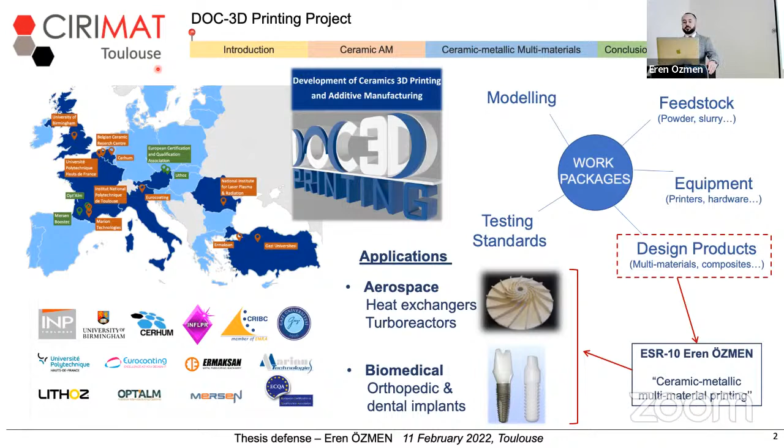Five work packages work collaboratively to transfer scientific knowledge into applicable industrial applications. As a member of the Design Product work package, my role in this project is to develop additive manufacturing approaches to fabricate ceramic-metallic multi-materials for applications such as aerospace and biomedical.

What is additive manufacturing? Additive manufacturing is a group of processes that create 3D objects layer by layer by following digital design data. According to the ISO ASTM joint standard, additive manufacturing can be divided into 7 subcategories, and this division is mostly done based on the feedstock used, for example powder or paste, or the energy source used, such as UV light or laser.

In today's presentation, the main consideration will be powder bed fusion technologies, and among those, selective laser melting and sintering. In a commonly accepted design for an SLS/SLM machine, there are 4 fundamental parts: the powder tank, building platform, powder spreader, and the energy source laser.

In the workflow of the SLM process, the building platform goes down and creates space for the newly coming powder layer, and the piston underneath the powder tank goes up and feeds the system with a certain amount of powder. The spreader spreads the powder on the building platform side, and once the powder layer is ready, the energy source selectively sinters or melts the powder particles to each other by following the directions coming from the digital design data, specifically for this layer. As this continuously keeps happening, the 3D object is finally formed.

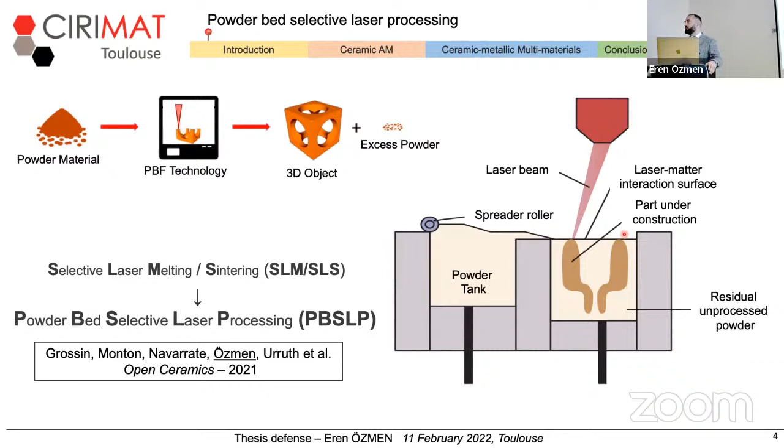In the review that we published in Open Ceramics in 2021, we proposed a name change from SLS/SLM to powder bed selective laser processing, instead of going by mechanism separation like sintering and melting, by just focusing on the process itself. So the acronym PBSLP will be used in this presentation to refer to this process.

Due to their good compatibility, metals and polymers are commonly used in PBSLP. For example, very complex shaped metal pieces can be fabricated with this method due to its design flexibility. On the other hand, personalized prototypes can be fabricated in a very short time by using polymers, as we see here for a jaw replacement operation, for example.

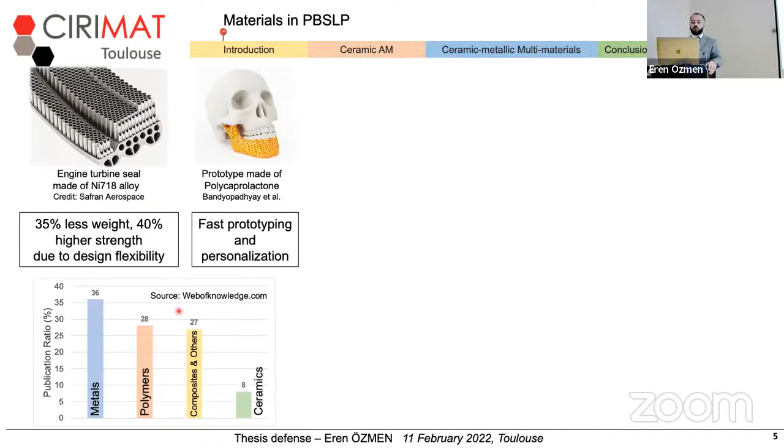When we check the number of publications in the literature that are focusing on PBSLP, we see that the majority of them are using metals, polymers, and composites. Only 8% of studies are focusing on ceramics.

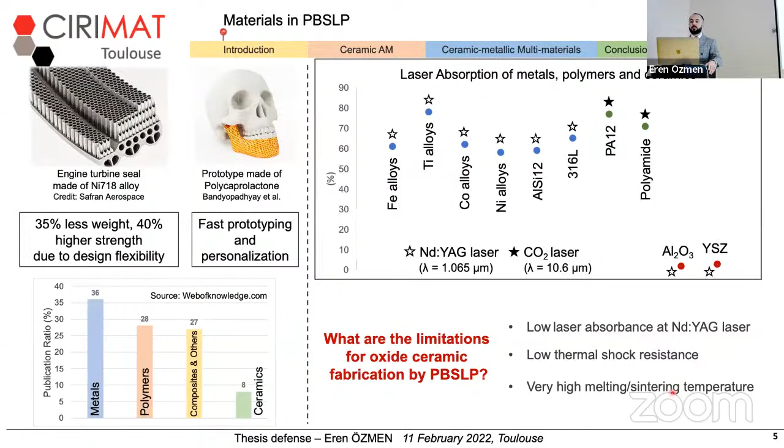So what makes them, especially white oxide ceramics such as alumina or zirconia, limited for this process? The first limitation is their low energy absorption, especially under Nd:YAG laser wavelength. Another limitation is their low thermal shock resistance, which is a problem in a process where very high temperature and very high energy are transferred to the material in a short time. And also their very high melting and sintering temperature, which is quite challenging to reach in a limited time as well.

To overcome these three issues, various strategies were applied in the literature. For example, Wilkes et al. in 2013 aimed at reducing the thermal gradients between cooling and heating by introducing a preheating system in their PBSLP machine. The preheating was applied at 1600 degrees to the building platform, and the final pieces with almost 100% relative density were obtained.

In another study carried out at the Belgian Ceramic Research Centre, alumina powder was combined with graphite as an absorbency enhancer, and after the PBSLP process, the density of pieces was around 85%. Then a thermal post-treatment was applied to the pieces, and relative density was increased up to 90%.

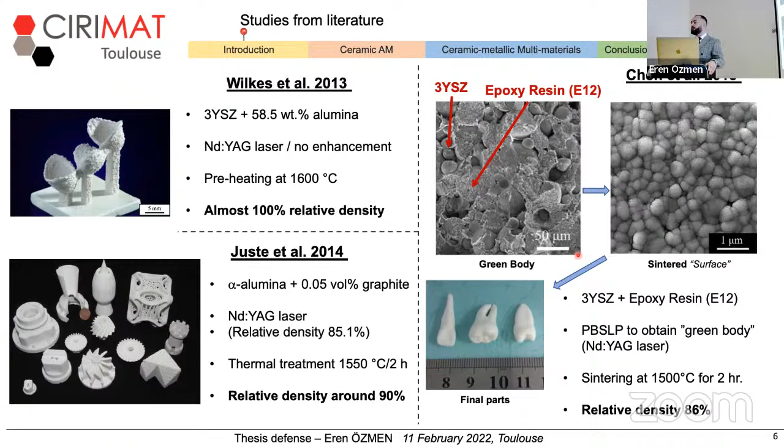In another approach applied by Chen et al., ceramic powder was mixed with epoxy resin, and PBSLP was used only to process the polymer inside the mixture to create green bodies. Then, to sinter the particles embedded in the polymer, a post-sintering process at 1500 degrees for 2 hours was applied, and pieces with a relative density of 86% were obtained.

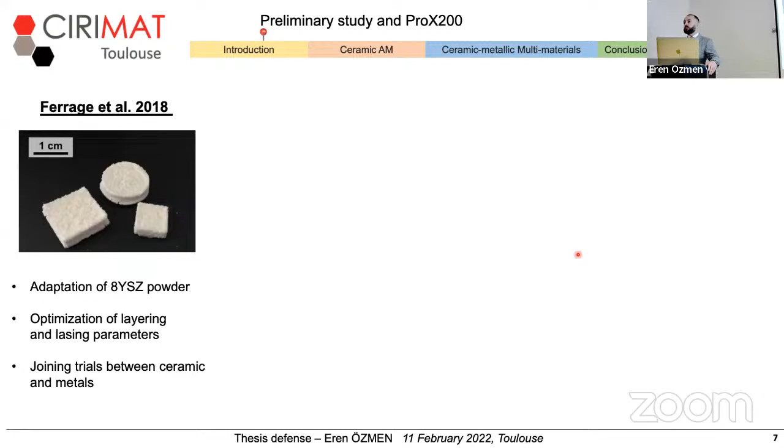Between 2015 and 2018, Loic Ferrage, who was a former PhD student in CIRIMAT laboratory as well, conducted another thesis work to fabricate zirconia pieces with direct PBSLP approach. As my thesis work is a continuation of this study, I believe that detailed information on that study is needed.

Pro X200 from 3D Systems was used as the PBSLP machine, equipped with an Nd:YAG laser with a spot size of 30 micron, which can be adjusted up to 40% by the focalization option. This machine allows users to perform studies in air or room atmosphere or inert atmosphere. Powder bed compaction is possible with the help of a roller drum, but pre and post heat treatment within the machine is not possible.

The design software provided with this equipment offers 5 different lasing patterns: normal pattern, grid, inward, outward patterns, and hexagonal island pattern. In this specific study, room atmosphere was used in all experiments, and no defocalization or pre- or post-thermal processes were applied.

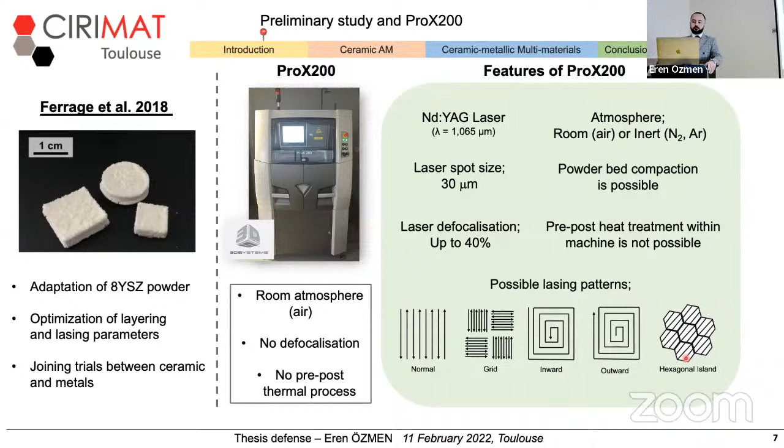8 mol% yttria stabilized zirconia powder was used in this study. It was provided by Tosoh with an almost perfectly spherical shape, almost full density inside, and good flowability, which is adapted for this process. This powder was completely made of cubic phase zirconia. However, there was a limitation with this powder.

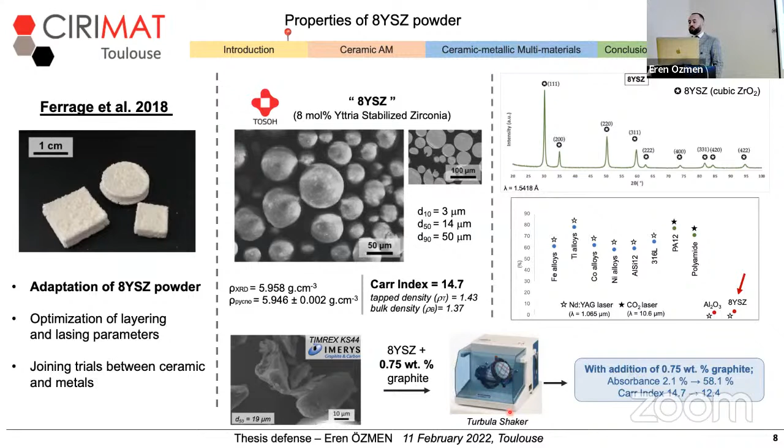The limitation was its laser absorbency under Nd:YAG wavelength. To overcome this issue, the ceramic powder was mixed with 0.75 weight percent graphite in a turbula shaker, physically. After this enhancement process, the absorbency was increased up to 60%, and the flowability was not affected.

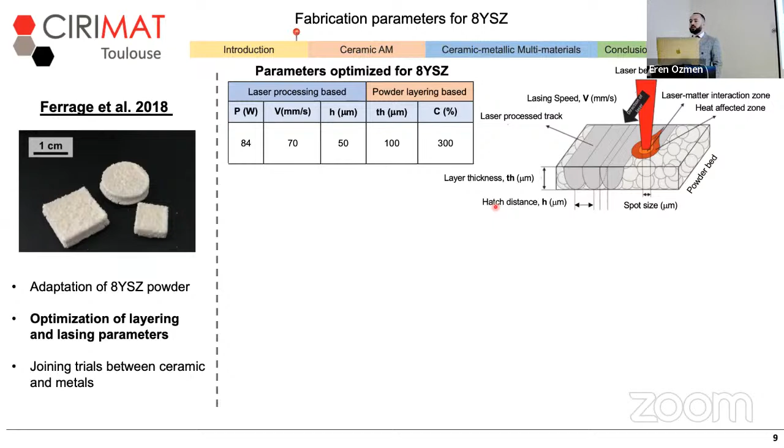Once the powder was ready for operation, laser-matter interaction parameters also needed to be fixed, such as laser power, lasing speed, layer thickness, and hatch distance, which is the distance between 2 parallel lasing tracks. These were fixed after optimization processes.

Solid, self-standing pieces visually corresponding to design data of 8YSZ were possible to fabricate with an energy density of 240 joules per cubic millimeter.

Once the pieces were fabricated, there were some limitations remaining. For example, on dimension, there were some upper limits to producing big pieces. Going for complex shapes was also challenging, to obtain cavities and hanging structures for example. Also, even though 8YSZ is commonly used for thermal applications such as thermal barrier coatings, there was a need for widening the application area.

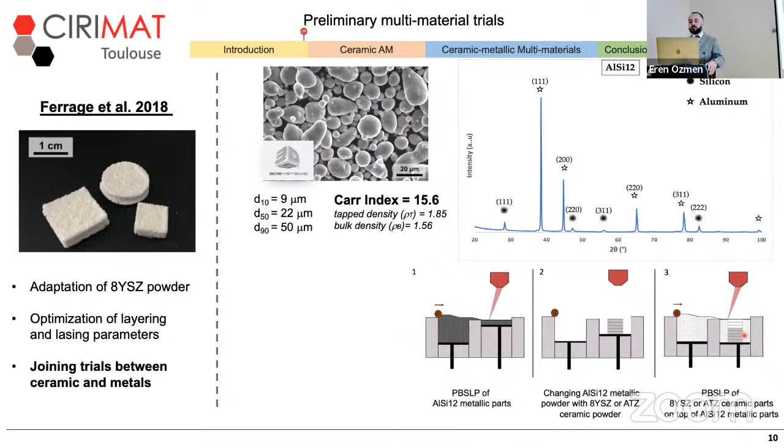Once solid ceramic pieces were fabricated, their combination with metals as a multi-material was also intended. For this, aluminum silicon 12 alloy was preferred as the metal part of the multi-material. First, in a single step, the metallic pieces were fabricated within the same PBSLP machine. Then, by only changing the metallic powder with ceramic powder, the ceramic pieces were deposited and fabricated directly on the metal parts. So in a single step, in a single machine, the multi-material was obtained, as shown in the example.

After both sides of the studies, there were some questions remaining. As the main objective of my thesis work, I was looking for answers to these questions separately for the ceramic parts and the multi-material parts. So after this part of the presentation, I will try to answer questions for the ceramic part first, and then come back to the multi-material part.

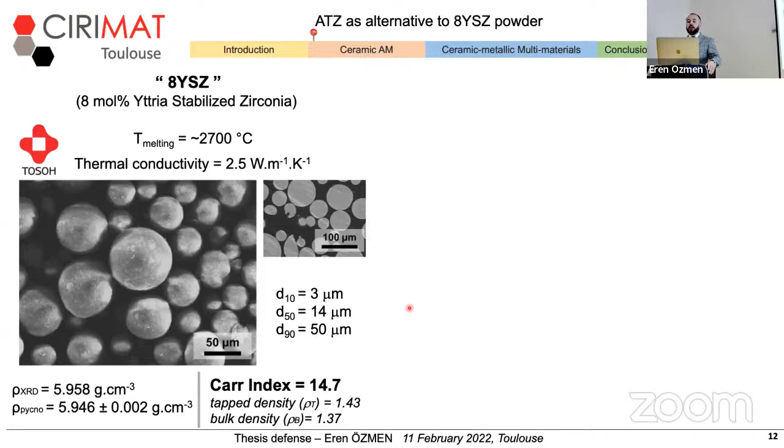The first question remaining for the ceramic parts was: are these optimized parameters specific to 8YSZ, or is it possible to use them for other ceramic materials? We talked about 8YSZ and its applications, and I was looking for widening the application area, specifically toward biomedical applications. So I was looking for possible options.

Alumina toughened zirconia, which has much better thermal shock resistance than 8YSZ, was a good candidate. A very similar morphologic powder was supplied from the same company, Tosoh. As we can see, they are both spherical, almost fully dense, and have similar flowability, making alumina toughened zirconia a good candidate for this process.

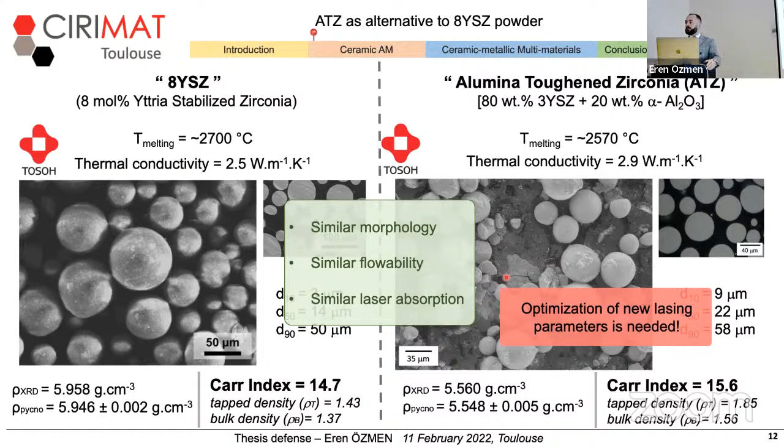However, due to its different chemical composition, a new lasing optimization was needed. Since their morphology, flowability, and laser absorbency are very similar, I took the energy density needed for 8YSZ fabrication as a reference point.

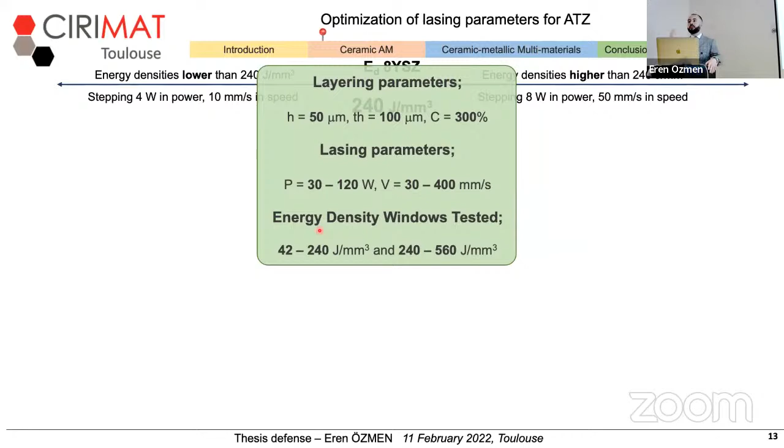I kept layering parameters stable as well, because they have similar morphologies. And I created 26 different combinations between laser power and lasing speed to try energy density windows lower than 240 and higher than 240 joules per cubic millimeter.

To evaluate the pieces that I fabricate with these windows, I apply 3 different criteria: pieces are existing on the platform, corresponding visually to the CAD data and design data, and pieces are defect-free.

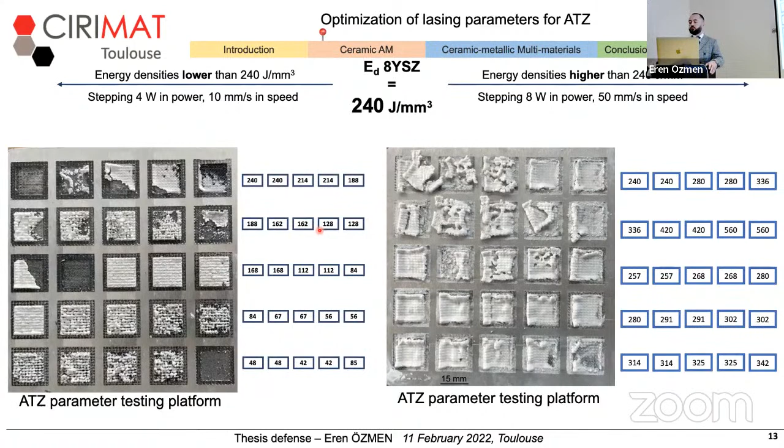So when we check the energy density higher than 240, we see that pieces exist on the platform. However, with all the other pieces in the same platform, they don't match the design data, and they're full of defects. When we check the energy density window below 240, a combination of lasing speed and lasing power was giving...

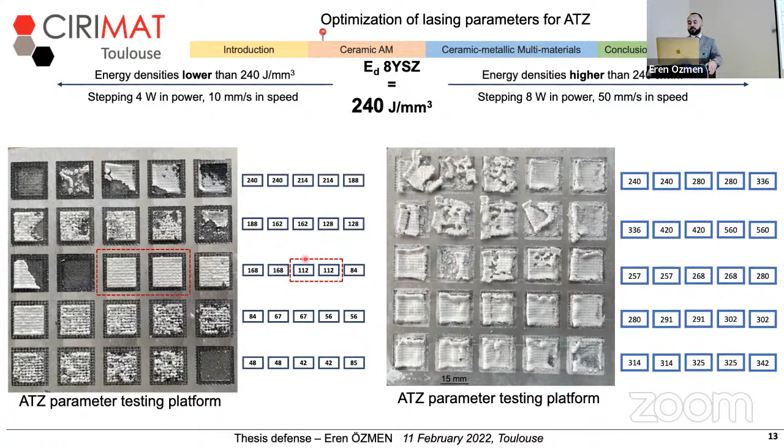pieces that satisfy all 3 of the criteria. So I accepted this energy density value and this combination as suitable for ATZ fabrication.

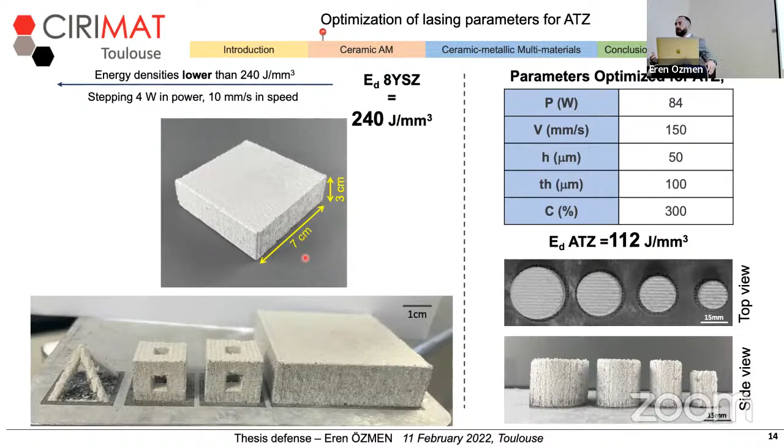And when I go for upper limits, ATZ pieces larger on surface area and higher in the Z direction than 8YSZ was possible to fabricate. When we go to upper limitations, very big pieces, solid pieces were possible to fabricate, and also complex shapes with inner cavities and hanging structures were possible to fabricate as well.

So we can answer the first question here: yes, with the re-optimization of lasing speed and lasing power, similar fabrication parameters can be used for a new material such as ATZ.

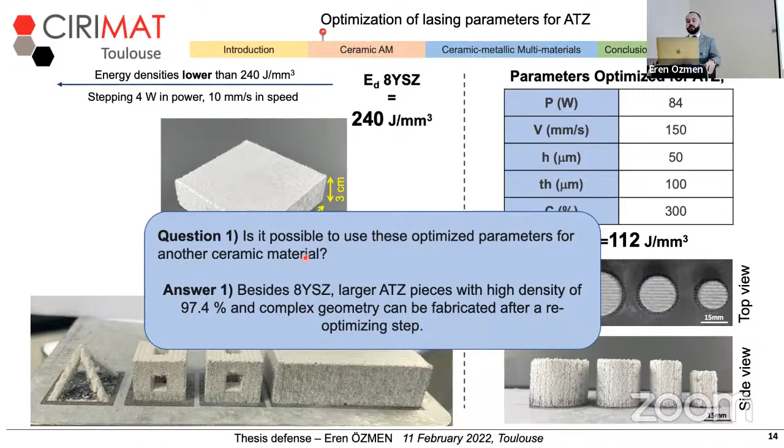So the second question was, what's the dimensional limitations and accuracy for these newly produced ATZ pieces? To test that, I produced two different pieces with two different shapes, and I compared the design data values with the measurements I did on the solid pieces.

What takes attention first is for all the types and all sizes of pieces, there's an enlargement on both surface area and the height. And the dimensional accuracy on the surface area is between 87% to 95%. And the dimensional accuracy on the height is around 98% for both types of pieces.

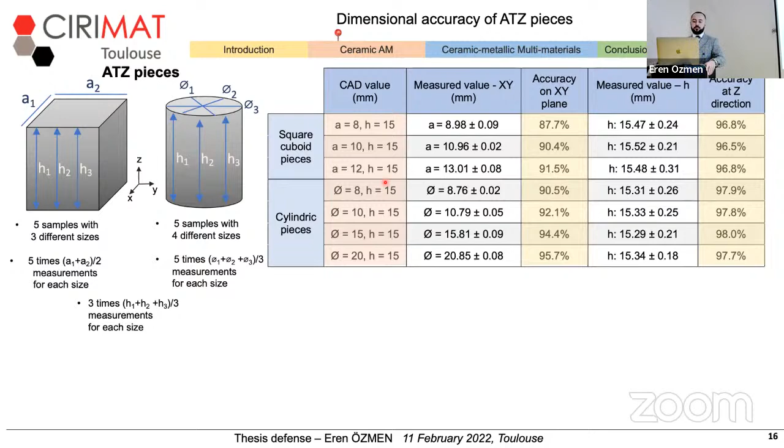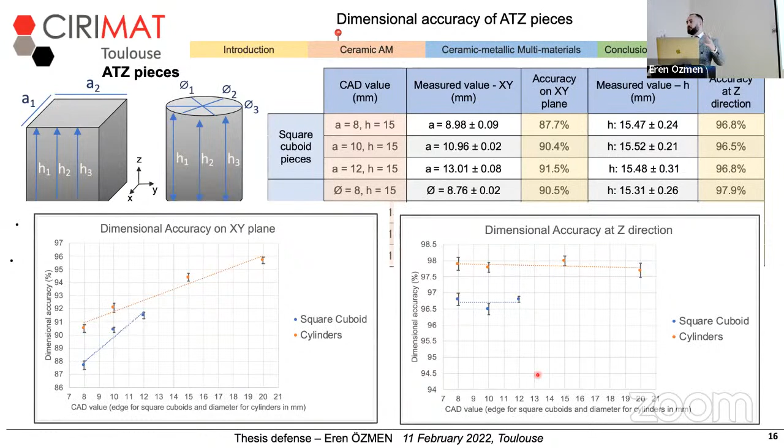When we see the dimensional accuracy on a graph, we can see that the dimensional accuracy is increasing with increasing surface area. However, the dimensional accuracy on the height remains stable with increasing piece size. So one explanation for this can be the laser matter interaction.

When the laser hits the surface, it creates a heat-affected zone. And when the laser is processing the corners of the piece, and also when we consider the spot size of the laser, the neighboring powders might be affected by this heat, and they can be included in the piece through sintering or necking between powders.

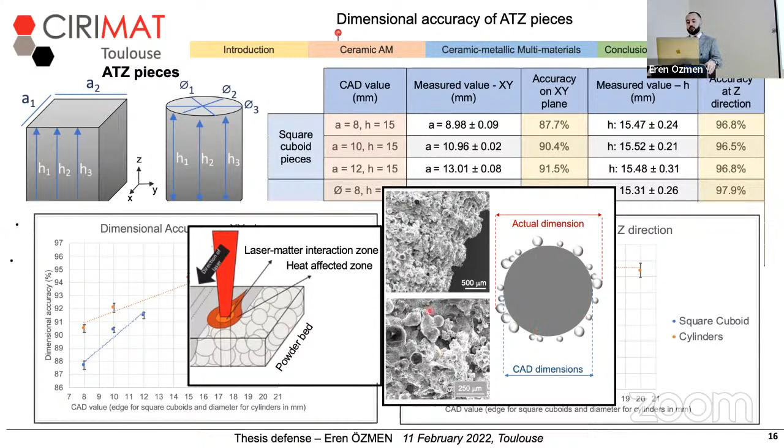So as we can see here in the illustration and the observations, we can say that for the second question, ATZ pieces with good dimensional accuracy can be fabricated. However, we still have sub-limits for fabrication of ATZ pieces. It was challenging to fabricate ATZ pieces with surface area of 4 by 4 square millimeters.

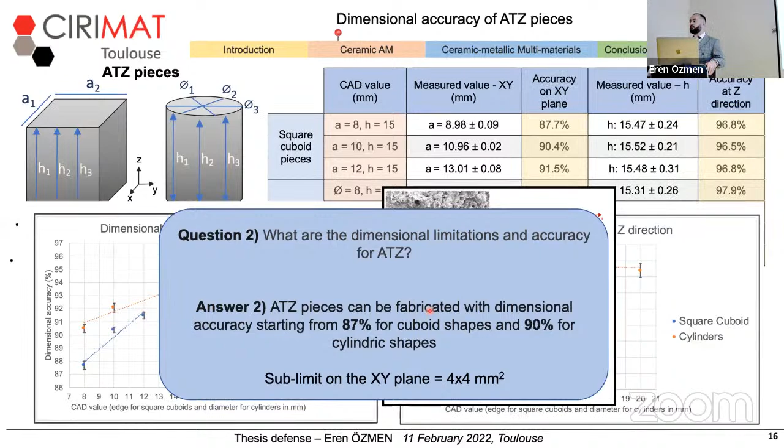The third question for the ceramic part consists of three sections: What's the effect of fabrication on the morphology? What's the effect of fabrication on microstructure and the crystalline structure?

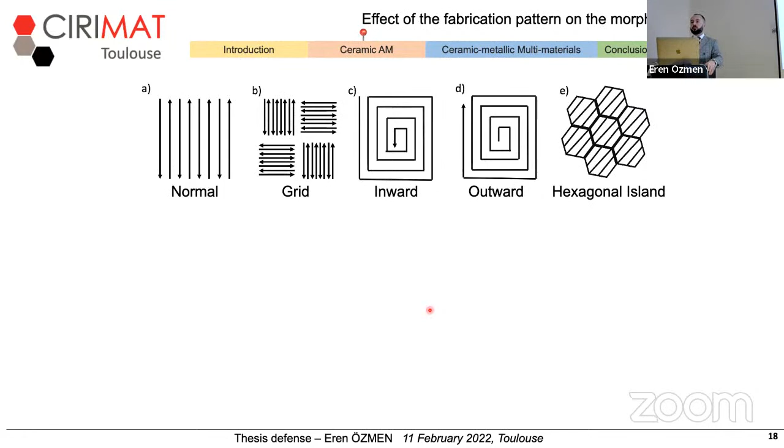Firstly, I tested the effect of lasing pattern on the morphology. And for 8YSZ fabrication, only normal and hexagonal island strategies were giving satisfying results. And when we compare them to each other, the normal strategy gives a higher surface roughness than the hexagonal strategy pattern.

And for ATZ, the only working pattern was the hexagonal island strategy. When we compare two different materials fabricated with the same strategy, hexagonal strategy, we see that ATZ pieces have lower surface roughness than 8YSZ pieces.

One explanation for this can be the melt pool, which is created during the lasing process. As the energy density needed for ATZ fabrication is almost half of 8YSZ, it might be creating less depth of melt pool, and that can be decreasing the surface roughness on ceramic pieces.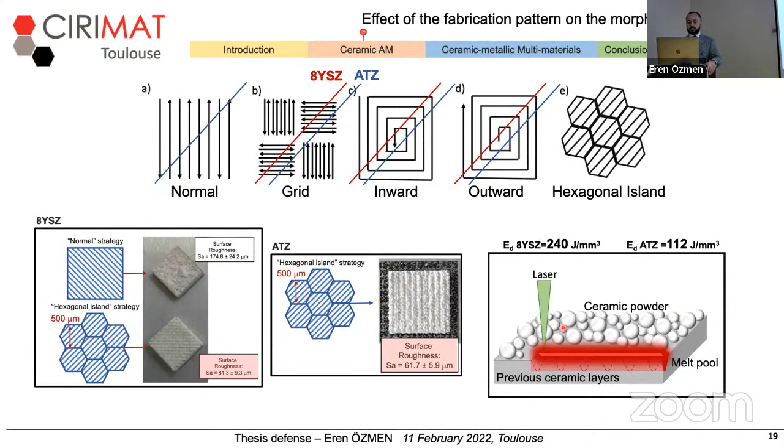When we check the effect of fabrication pattern on the cross-section, the vertical polished cross-section of pieces, I first compare 8YSZ pieces fabricated with two different strategies. And these scanning electron microscopy images, when I process them with image analysis software ImageJ, I see that the porosity in the hexagonal pattern fabricated piece is almost 4 times that of the one fabricated with normal strategy.

And also what takes significant attention here is the cracking pattern in the two pieces. In one, the cracks are more parallel to the fabrication direction and narrower, and they show 3 different distributions in the microstructure: close to surface, in the core, and close to the building platform. On the other hand, we have larger cracks, which go through almost the entire structure and end up at the surface.

When we include the ATZ pieces fabricated with hexagonal pattern, we see that cracking is shorter, kind of homogeneously distributed through the structure, and more narrower if we consider the defects as well. So the porosity obtained for this piece was around 7%.

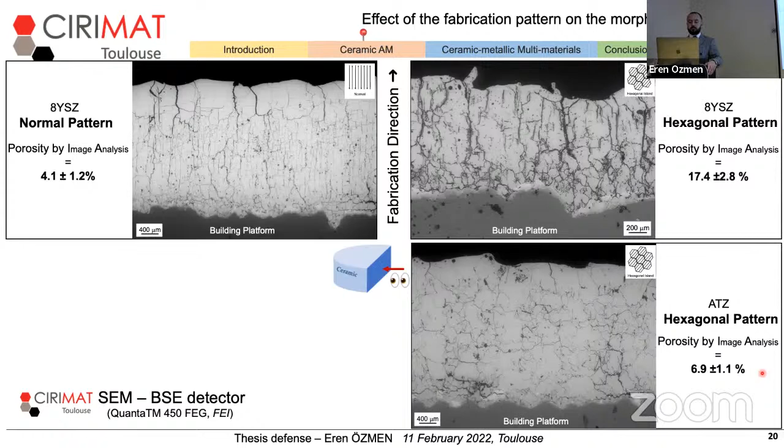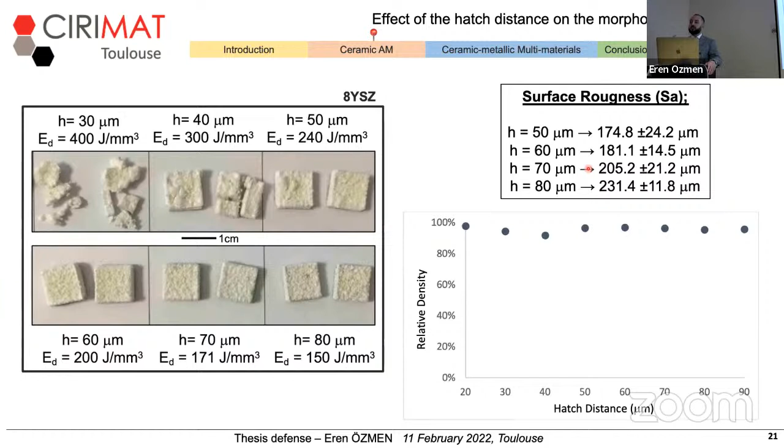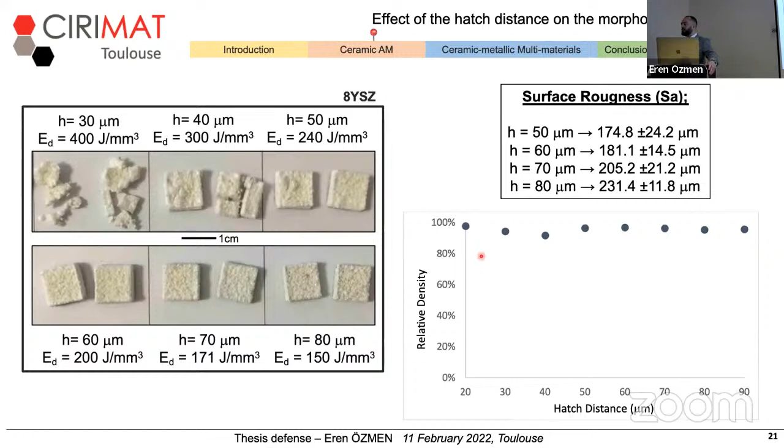The next effect was checking the hatch distance. For 8YSZ pieces, except 50 micron which was kept stable during process optimization, hatch distances 60, 70, and 80 were also working. The most significant change was observed on the surface roughness, which increases with increasing hatch distance.

The relative density of pieces remained stable with increasing hatch distance. When we applied different hatch distances on ATZ fabrication, we see that except for 50 micron, none of the hatch distances gave satisfying results, with pieces being full of cracks and defects. So for 8YSZ fabrication we have a wider parameter area, two strategies, normal and hexagonal, for hatch distances, while we have only one pattern and one hatch distance, 50 micron, working for ATZ fabrication.

So the next question was, what was the effect of fabrication on the crystalline structure of pieces? Here we see the powder of 8YSZ and ATZ before the lasing process, compared with the solid pieces after fabrication. For 8YSZ, the first thing that takes attention is the remaining cubic phase. As no new peaks appear or any peaks disappear, and by comparing the database of XRD, we say that the cubic phase is retained.

When we stack these patterns on each other, we see a narrowing of the peak for the fabricated pattern. When we calculate the crystalline size with the Scherrer equation, this narrowing was an indication of crystallite growth, which we confirm after calculation. When we check the ATZ before and after fabrication, the most significant change is the disappearing of the monoclinic phase.

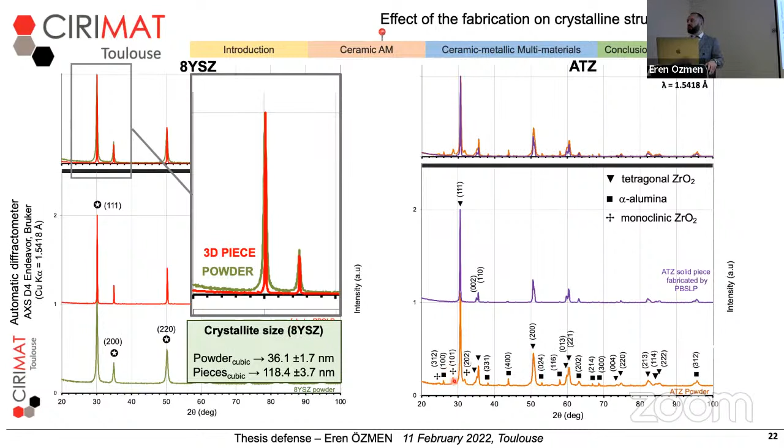This monoclinic phase appears in the powder but cannot be observed in the solid piece. The solid piece was completely tetragonal phase zirconia, and the same narrowing of the peaks was observed for ATZ as well. When we calculated the crystalline size, we see crystalline growth also for the tetragonal phase and alumina inside the ATZ. The reason for this crystalline growth is most likely melting, or, while upper layers are processing, the heat affected zone causes repeating heating in the lower layers, which causes enlargement and growth of the crystals.

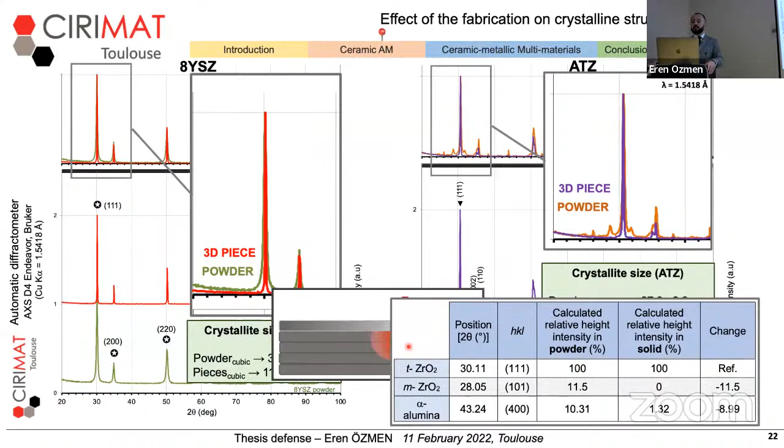When we calculated the relative intensity of phases in the ATZ pattern, we see that the monoclinic phase completely disappears from the structure. One explanation for this can be given on the phase diagram between zirconia and alumina. The composition might go to complete melting, and during cooling down, due to fast cooling or quenching, the composition might be stabilized in the metastable tetragonal phase.

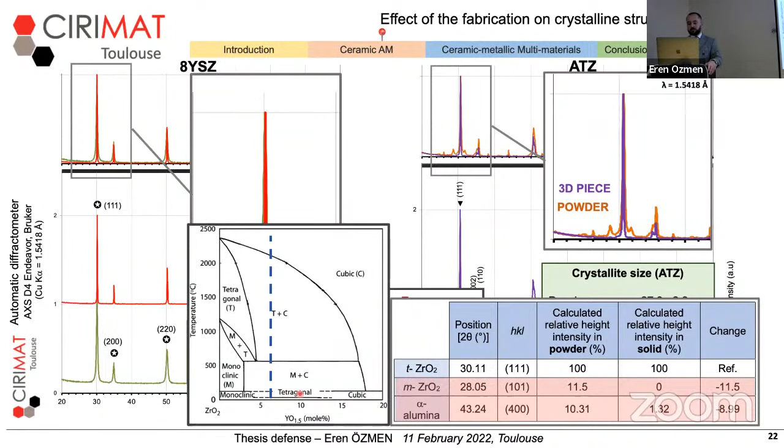And we can answer the second part of the third question here: crystallite growth is observed for both materials, and while fabrication does not cause phase change in 8YSZ, fabrication caused the disappearing of the monoclinic phase in the ATZ structure.

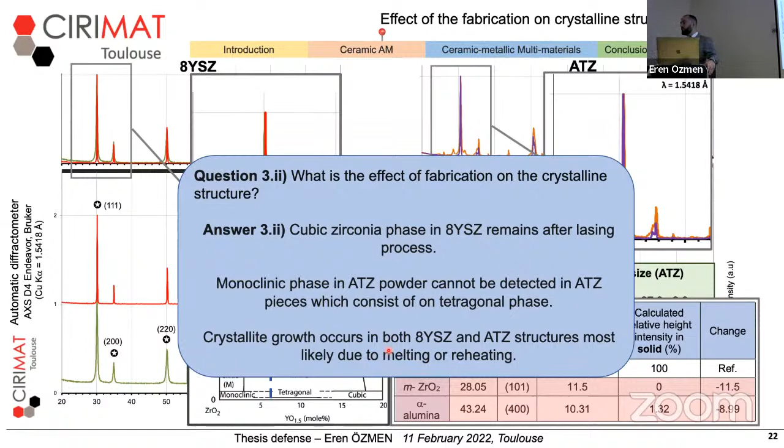When we observe the cross-section of ceramics with scanning electron microscopy, we see that for 8YSZ, two microstructures appear in the observed zone. The first microstructure is mostly distributed through the structure with coarse grains, and the second microstructure is mostly in an elliptical shape, appearing locally inside the first microstructure.

To see the distribution of elements in these microstructures, I ran an EDX elemental mapping. When I overlapped all the elements, we see 8YSZ everywhere inside the microstructure. So the first and second microstructures have the same composition with different morphology. What was unexpected was finding aluminum and oxygen in this composition in some specific areas.

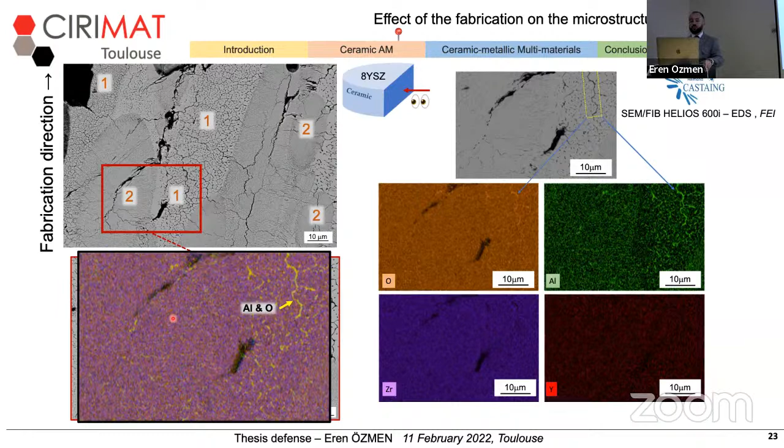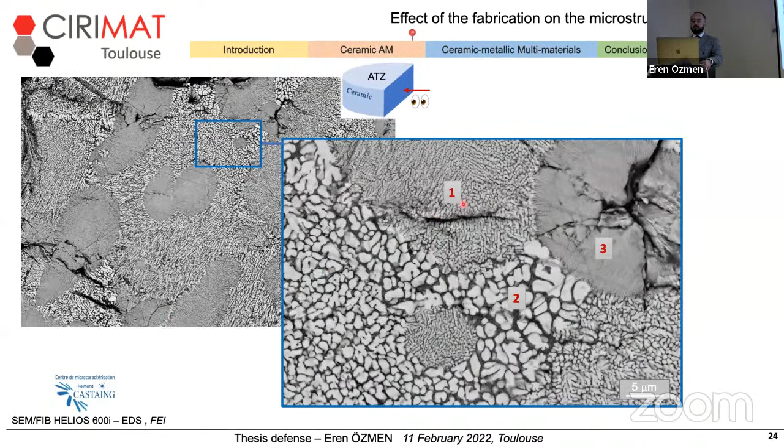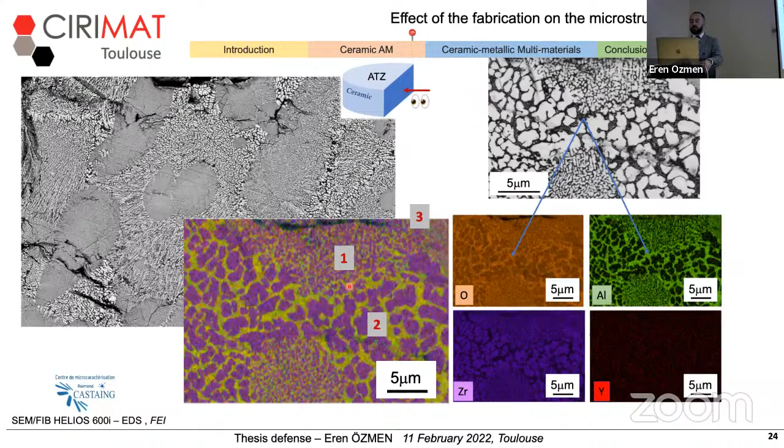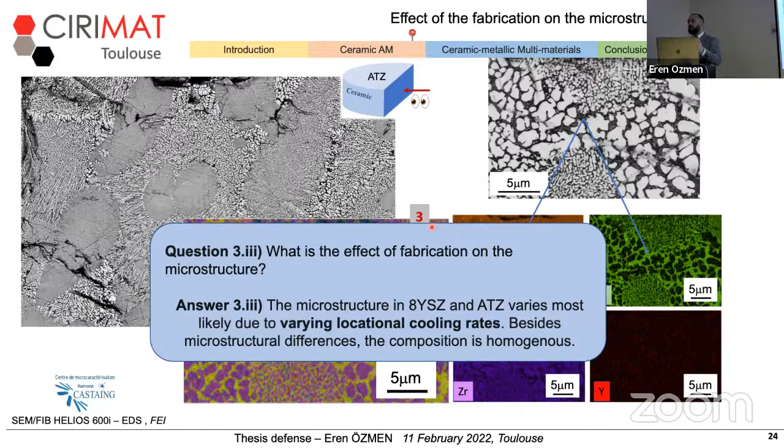When I checked ATZ, similarly, we identified three microstructures with fine, middle, and coarse grain sizes. Running a similar elemental mapping, I found the composition is still homogeneous, with ATZ distributed everywhere. The only difference is the size of grains in these three microstructures. The reason for these changes in microstructure, despite the same chemical composition, might be due to locationally varying cooling rates and their cooling speed.

So to conclude the first part for ceramics, we can say that very complex shaped ATZ pieces with very high relative density can be fabricated. We also have a larger parameter window that works for 8YSZ based on the pattern and hatch distance. And as there is no phase change for 8YSZ, we observe the disappearing of monoclinic phase in ATZ structure, and an irregular microstructure observed for both materials without a change in their chemical composition.

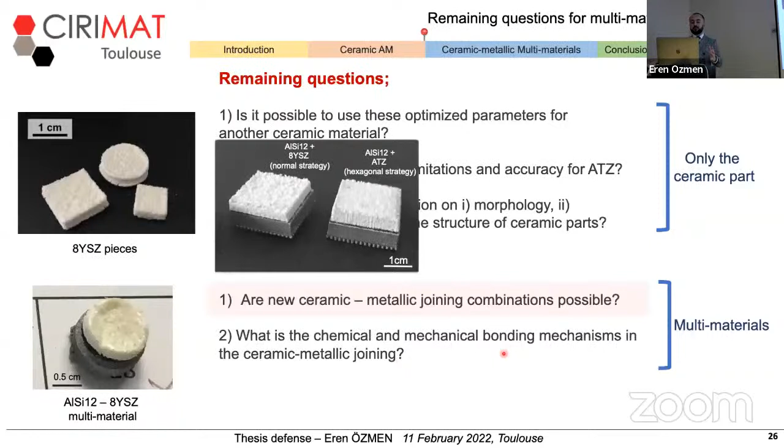So after answering these 3 questions for the ceramic parts, I want to come back to questions remaining for multimaterials. I can say that with this optimized parameters for ATZ and 8YSZ, it was possible to obtain new multimaterials with the same method by including the ATZ in the structure. So the first question can be answered here directly.

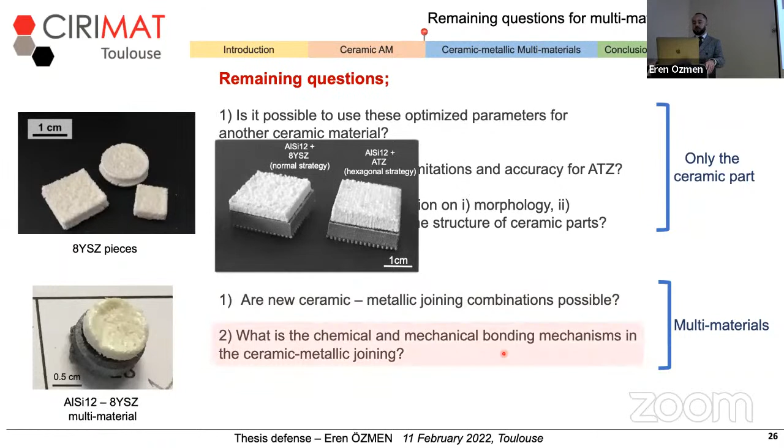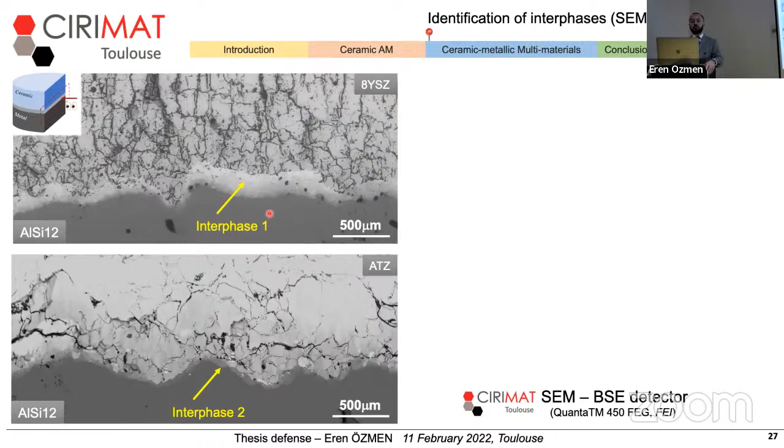So the second question is, what's the chemical and mechanical bonding mechanism in this ceramic metallic joining? To answer that, I take a cross-section, vertical cross-section of multimaterials, and when I observe them with scanning electron microscopy, I observe 2 interphases for 2 multimaterials. Then with higher magnifications, we see that the borders of these 2 interphases are quite easy to separate from the rest of ceramic and metallic parts.

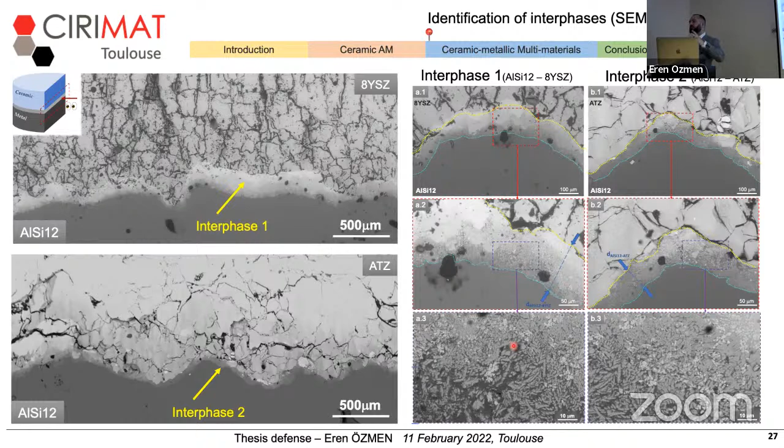And when we come closer to these magnifications, we see that there is grading in this microstructure. So at the highest microstructure imaging, I see that this microstructure is completely different than the ceramic and metallic part itself. So to check what are those microstructures and what's the elemental distribution, I again run an elemental mapping on these microstructures, and I checked 4 different elements coming from ceramic and the metallic part.

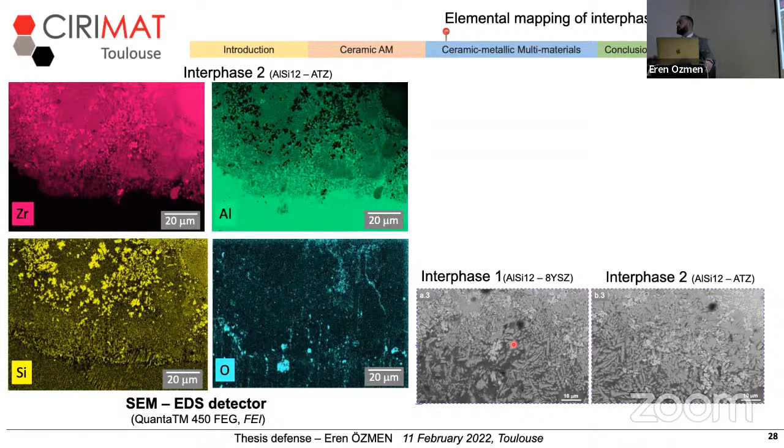So before overlapping these elements, I had to change silicon from yellow to blue because yellow is also a mixed color, so to prevent confusion I had to identify it with blue. When I stack these images, I see some purple areas, which is a mixture of red and blue, meaning a mixture of zirconium and silicon, appear in the microstructure. That was very interesting because zirconium is coming from the ceramic and this silicon is coming from the metal.

For me, that was the first indication that a chemical interaction is occurring between the ceramic and metallic part, with 2 different elements existing in the same area. Another interesting outcome from this measurement was the inability to detect yttrium in this area. As yttrium is used as a stabilizer in zirconia structure, it's surprising to not detect yttrium here while zirconium is existing in the interface. So this characterization raised 3 main questions in my mind: what's the depth of interaction of these elements, how far they go, where is yttrium, what happens to yttrium, and which new phases occur among these unexpected elements.

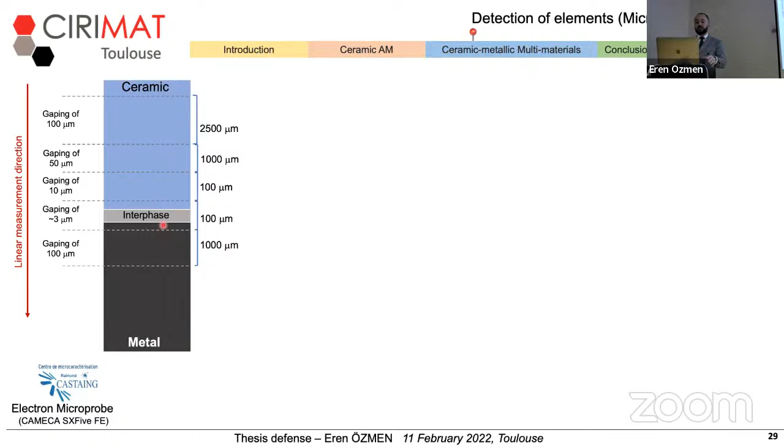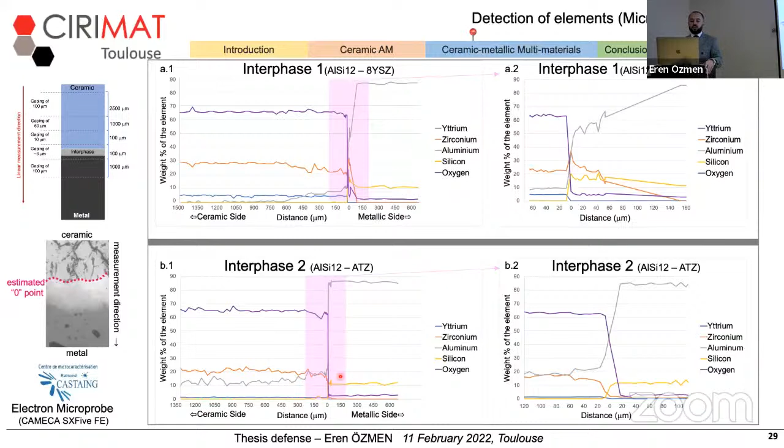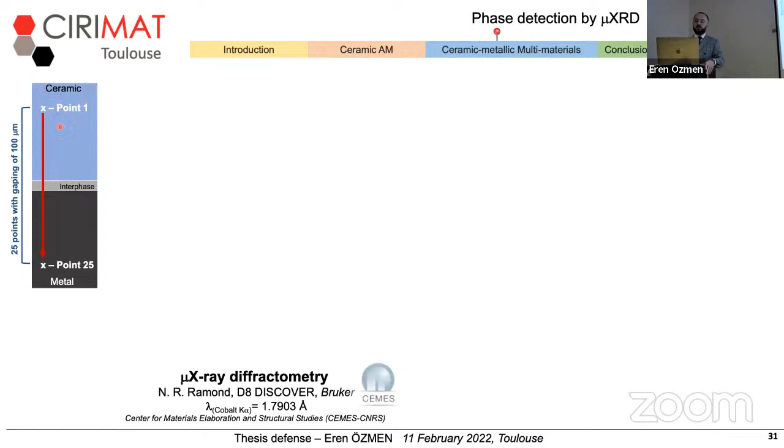To answer the second part of the question, what are the possible phases occurring in this interface, I perform micro XRD analysis as well. To do that, I follow a path of measurement points, 25 points with gapping of 100 microns, starting from the ceramic part, going to metal, passing through the interface.

So when I check the XRD pattern of all these points, I see that 2 points correspond with interphase 1. When I check the possible phases by comparing the peaks with the XRD database, I see that an intermetallic phase between zirconium and silicon, and also a ternary phase among aluminum, silicon, and zirconium, appears in the structure.

When I check the second interphase, there is only one point corresponding to the interface, shown with gray color. There was also the ternary phase of aluminum, silicon, and zirconium. However, the creation of these interphases and its creation mechanism was still a huge question mark.

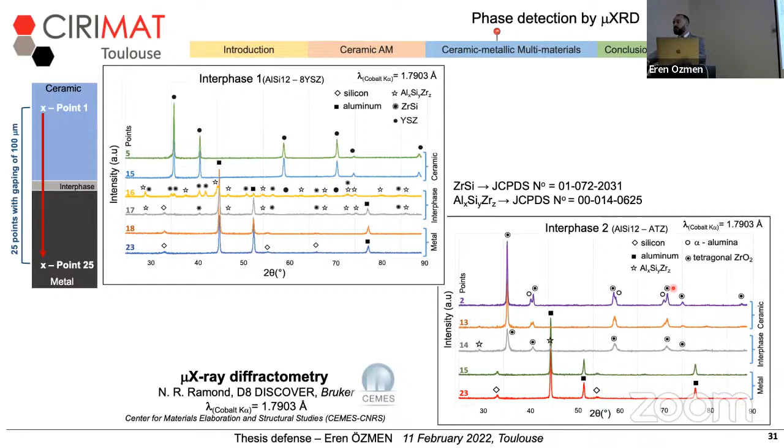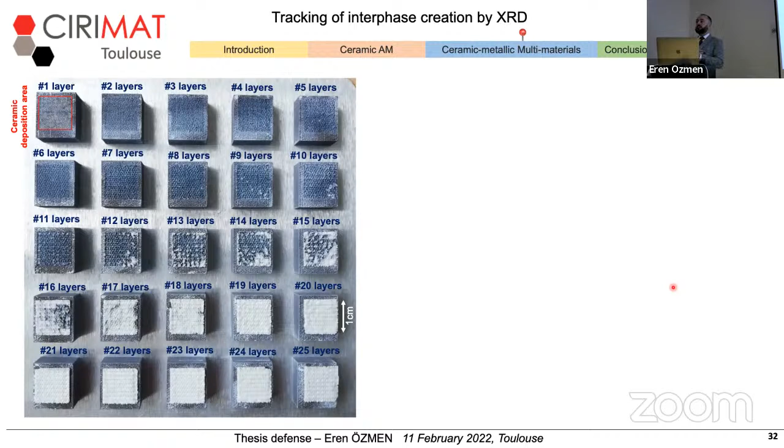To answer that, I ran an experimental procedure where I deposit 1 to 25 layers of ceramics on metallic substrates, and then I take XRD patterns of each sample from the top surface. Then I stacked these XRD patterns on top of each other, and from first layer to 25 layers, I followed the changes in the XRD pattern.

So for the first interphase, we can say that starting from the first layer up to the 7th layer, we observe the creation of the intermetallic phase and the ternary phase. After the 7th layer, the composition goes exactly like the ceramic structure.

For the second interphase, we also see the creation of this intermetallic phase and the ternary phase for the first 5 layers. After this 5th layer, the composition goes as ATZ structure. So this part can be concluded as: for the first interphase, it takes 7 layers for the interphase to appear, and for interphase 2, it's the first 5 layers.

However, there are still some questions remaining. For example, what's the exact composition of this ternary phase, which was detected in microdiffraction analysis, and also still, in which form yttrium appears or disappears from the structure.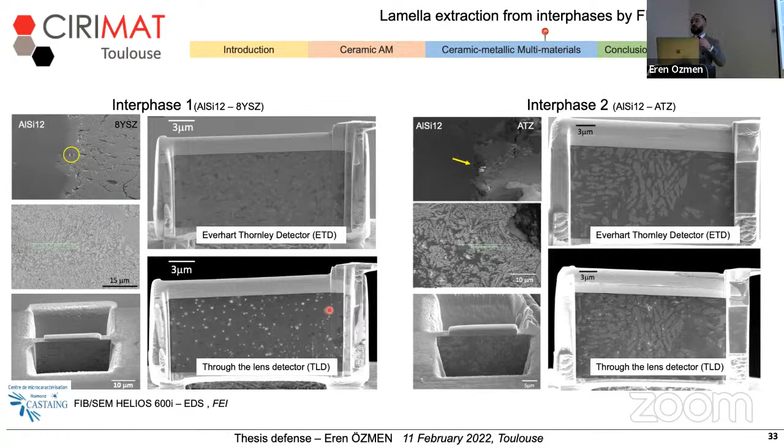As this lamella exactly corresponds to the interface, I wanted to perform another elemental mapping at high magnification. For the two interfaces shown side by side, we can see the intermetallic phase between zirconium and silicon, where only silicon and zirconium appear, but aluminum does not appear in both interfaces.

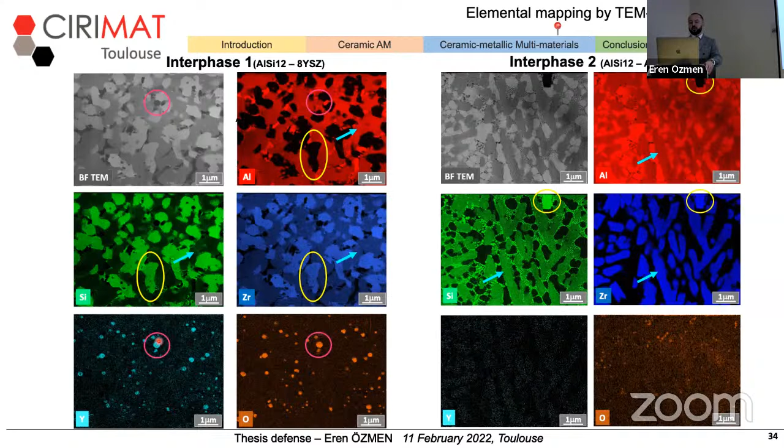And the ternary phase, as all three of them—silicon, zirconium, and aluminum—appears in both structures. However, there were some point-shaped areas observed where there is aluminum, oxygen, and yttrium, which was indicated with pink circles. The composition and situation of these circles was still a question mark.

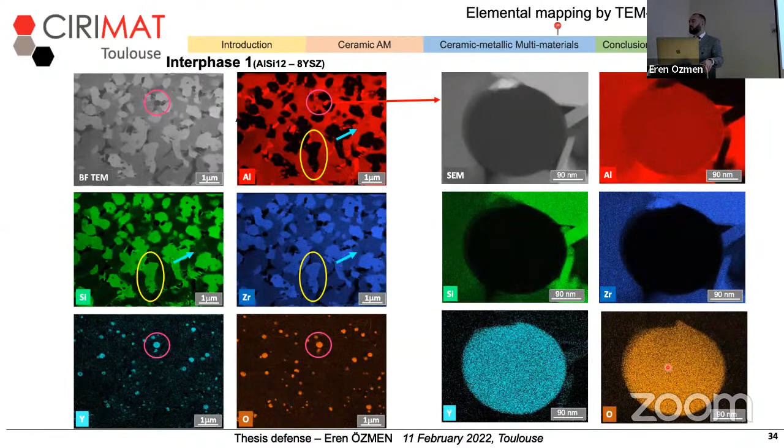So I increased the magnification again, and I specifically studied these dot-shaped areas. What I see is that these dots are actually aluminum, yttrium, and oxygen-rich areas where there is no silicon and zirconium.

When I compare the existing elements with the phases that I detected in microdiffraction measurement, I see that for the first interface, the ternary phase appears in one area, the intermetallic phase appears in one area, and aluminum and silicon appear in different areas. However, there are no phases detected, including aluminum, yttrium, and oxygen, shown in the microdiffraction measurements.

So what I do here is choose a method that lets me study the crystallinity of these phases appearing in the structure. When we choose two areas, one aluminum-oxygen-yttrium rich and one the ternary phase, and use selected area electron diffraction, I see that while the ternary phase gives diffraction patterns, the yttrium-rich circular area does not give any diffraction patterns. That means this structure is amorphous.

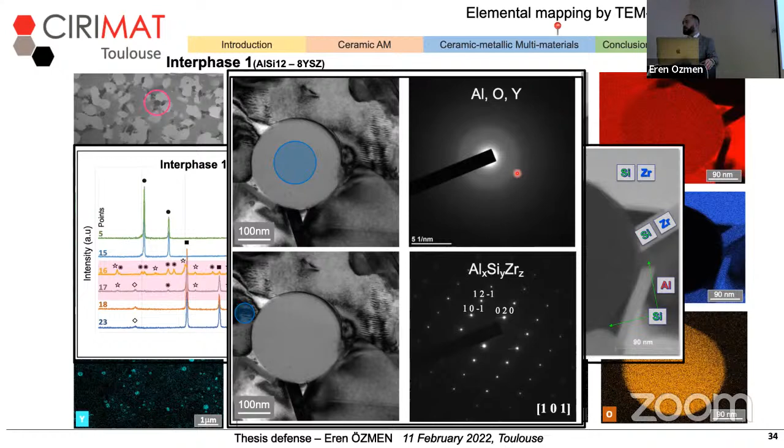That might be the biggest indication of why it's not detected in XRD measurements.

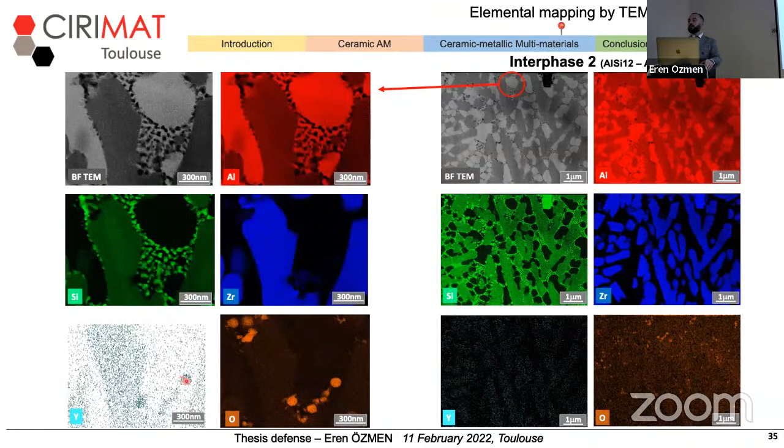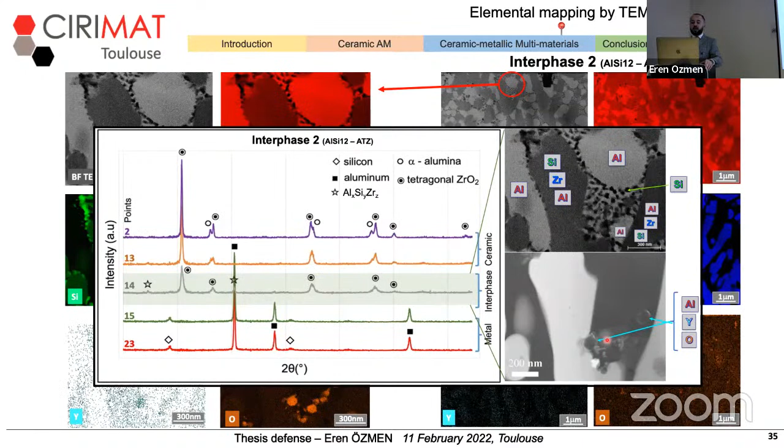So for the second interface, if we come back there, we again see some yttrium-concentrated dot-shaped areas. And when I study them again, as shown here, aluminum, yttrium, and oxygen-rich areas, we again cannot see them in the microdiffraction measurement.

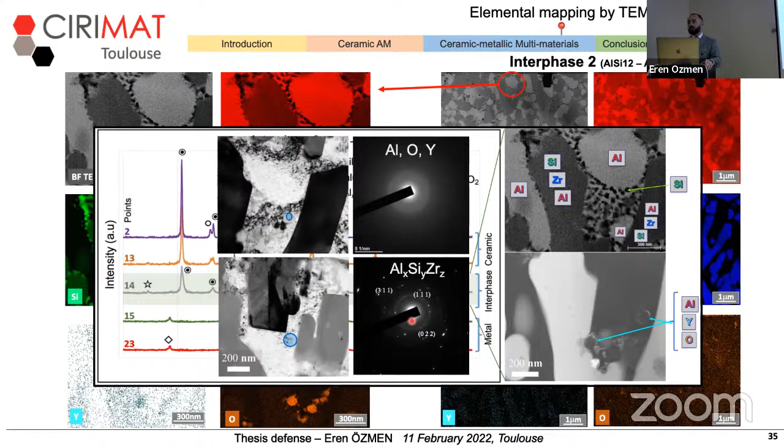And again, when we compare the aluminum, oxygen, yttrium-rich areas where the ternary phase appears, while the ternary phase gives diffraction patterns, the yttrium-rich areas do not give any diffraction patterns because they are amorphous again.

So the question remaining still was, what's the exact composition of this ternary phase? To calculate the elemental atomic ratio of these two similar zones, two same zones, I needed two pieces of information: the thickness of this lamella and a density.

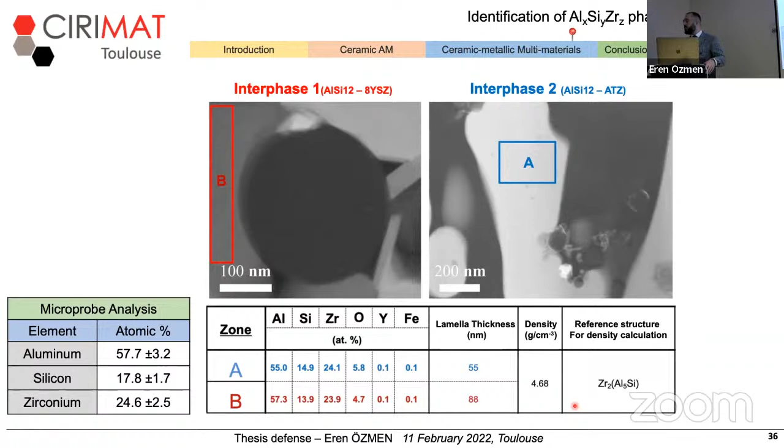Then I was able to calculate the atomic percentage of each element existing in this area. To calculate the lamella thickness, I used a model and a software that gives you the data of thickness. Then I took a reference structure to estimate the density of this ternary phase. When I ran the calculation for the elements, I saw that it corresponded perfectly with the atomic values of elements I detected in microprobe analysis. That helped me say that the reference structure I took for this ternary phase can be a good candidate for its identification.

So to conclude this second part, the multimaterial part, we can see that a chemical interaction and bonding between the metallic and ceramic part is created, because we observed an interface. This interface has a different composition, including a ternary phase and intermetallic phase, and it's different from both the metal and ceramic parts. Also, one important outcome from this part was that the interaction zone is larger than observed in some images.

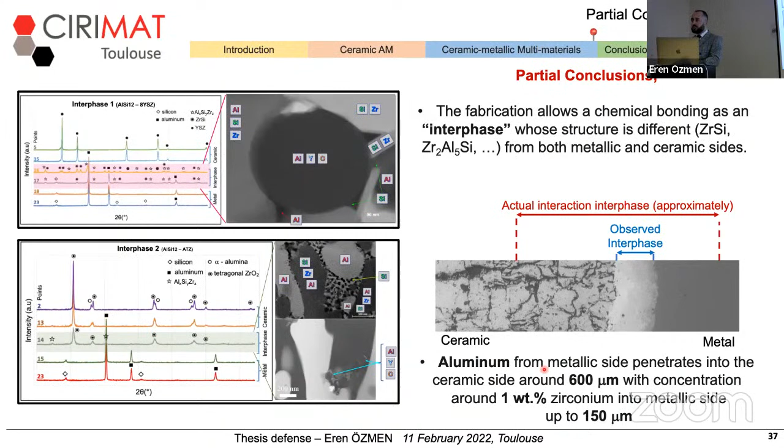We see that aluminum can be detected in the ceramic part up to 600 microns in the first combination, and up to 300 microns in the second combination.

So to conclude the entire presentation, I can say that 8YSZ and ATZ fabrication is like a game of compromises. 8YSZ has a larger application area and larger parameters that can be applied to the ceramic powder, for example more lasing patterns, more hatch distance, and that kind of parameters. On the other side, we can apply a smaller parameter window to ATZ. However, with ATZ we can obtain more complex shapes that we cannot obtain with 8YSZ.

For the multimaterial side, we see that the first interface is thicker than the second one, and that was also identified in the microprobe analysis. Very similar phases appear in both interfaces, even though the joined multimaterials are quite different from each other. The appearance of an amorphous phase among aluminum, yttrium, and oxygen was observed for both interfaces as well.

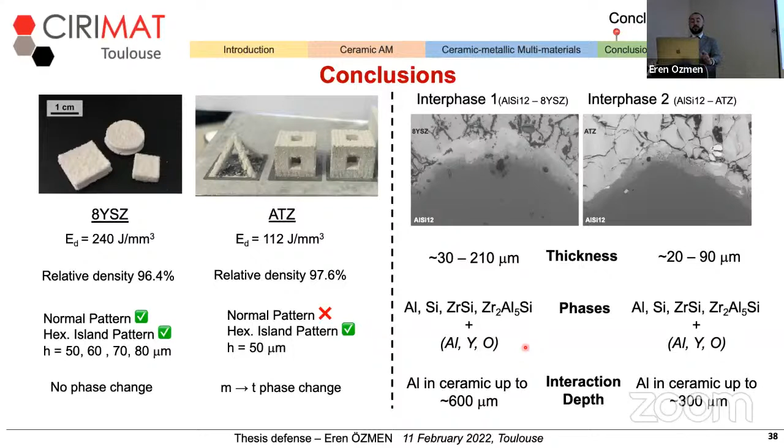And the interaction depth is larger than... sorry. So what would be the perspectives for this study?

Firstly, mechanical testing of both sides: the ceramic fabrication, and also the joining forces between ceramic and metal parts in multimaterials. For ceramic parts, I would offer compression, tensile, and three-point bending tests. And for the multimaterials, to check adhesion between ceramic and metallic parts, I would offer shear test and three-point bending test.

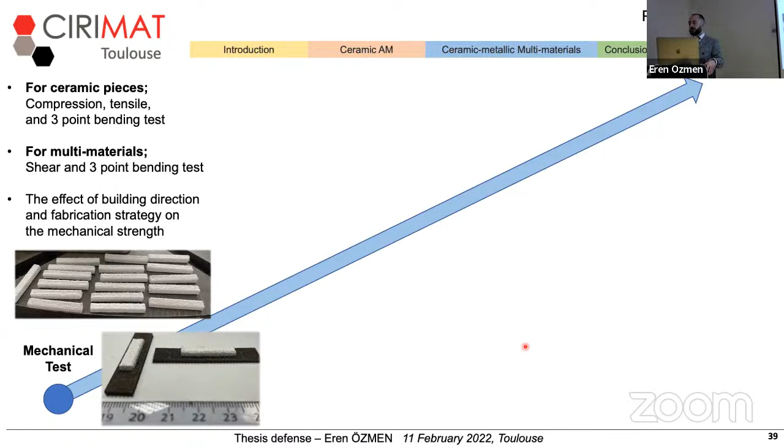As a second step of perspectives, I would offer imaging of the interaction zone, and also measuring the actual temperature of the interaction zone to understand much better which temperature we are reaching, what's the possible kinetics at this temperature, which will be very helpful to understand the creation of phases in the structure. This can be done using multi-wavelength pyrometers or high-speed cameras, or a combination with modeling, for example.

The third and last perspective I would offer would be introducing new multimaterial combinations and their optimization for this process, to widen the application area of multimaterials. For example, for ceramic parts I would offer cerium stabilized zirconia or alumina and its derivatives. And for the metallic part, I would offer titanium or cobalt-chrome based alloys.